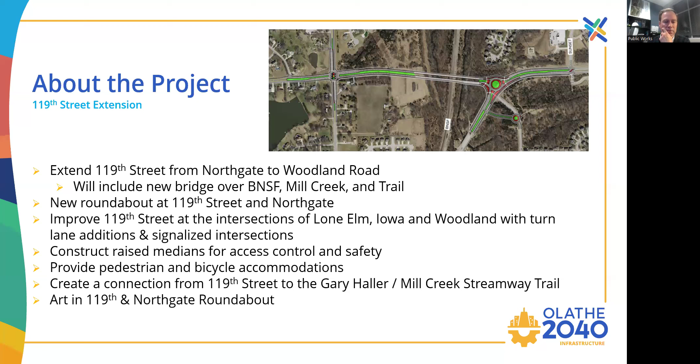Looking at the project as a whole, we will have improvements at the 119th Street and Lone Elm intersection, with turn lanes in all directions as well as a signalized intersection. We will have improvements at 119th Street and Iowa, new turn lanes in all directions and a signalized intersection, as well as removal and replacement of an existing wall on the southwest corner of that intersection.

Moving east to Woodland, this is where our intersection improvements increase in scope to allow for that new section of 119th Street between Woodland and Northgate. This is where we begin to taper out to meet the four lanes on the east side of that intersection. To accommodate that, we will also have improvements at Cherry Lane to tie that back into Woodland Road.

The actual 119th Street extension will be a 4-lane divided arterial section. Two separate 860-foot span bridges, 60 feet high at some points, will serve as our grade-separated railway crossing over BNSF, Mill Creek, and Trail.

Further east, we will tie in 119th Street at Northgate with a new roundabout. We will also realign the Northgate and Nelson intersections further south to safely tie into those new roundabout improvements to the north.

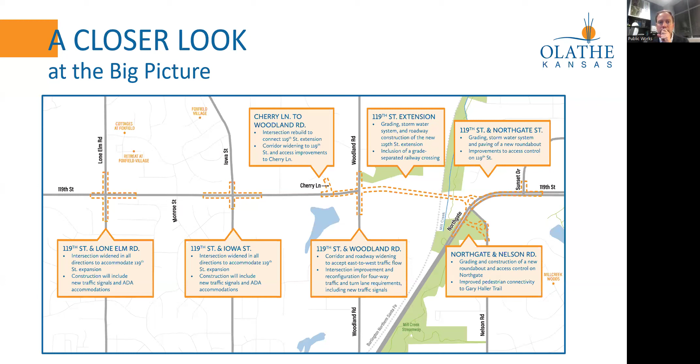Introducing our construction team. Again, my name is Neil Meredith. I'm the project manager for the city of Olathe.

Also on our team for this project from the city of Olathe will be Steve Craig and Roderick Montgomery. They will be our daily on-site presence from the city of Olathe. We will also have our inspection supervisor, Nate Gronow, present on this project as well.

Our construction team is led by Pyramid Contractors, Inc. They are a very experienced bridge contractor here in the city of Olathe.

They've completed multiple projects in the last few years alone, and the city is excited to have them on board for this project. Their main points of contact: their project manager is Pat Weaver, and their field contact is Blair Lecluse.

Joining us as well will be our structural inspectors from HDR, John Casey and Drew DeGoo. HDR is also our design engineer for this project.

Walking through our anticipated construction sequence for this project, our general schedule was set up to try to minimize impacts to traffic as best we could, knowing that impacts could not be avoided.

Our intent in 2025 is to work on the west side of the project between Lone Elm and Woodland. Along with those 2025 improvements, we will have a contractor presence between Woodland and Northgate.

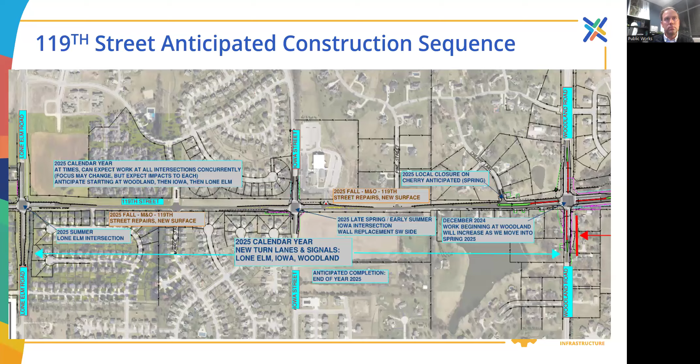Moving to the central and eastern portions of our project, I would expect a heavy contractor presence in 2025 and 2026 between Woodland and Northgate for the new 119th Street bridge construction. We also have a substantial water line relocation in that area as well.

Moving into 2026, we would expect to see impacts at the new 119th Street roundabout. We will do our best to limit that closure. The city has done proactive scoping items, working with the developer on the south side of that street to construct some sidewalk and readjust grading to prepare for those improvements, minimizing impacts to both their development and traffic, and to expedite our work. But we would expect that to be a substantial closure due to the scope of that roundabout and the activity needed at that location.

It will not be for all of 2026, but I would anticipate it's a pretty substantial piece of 2026. The city will provide updates as we get closer to that construction through the city website.

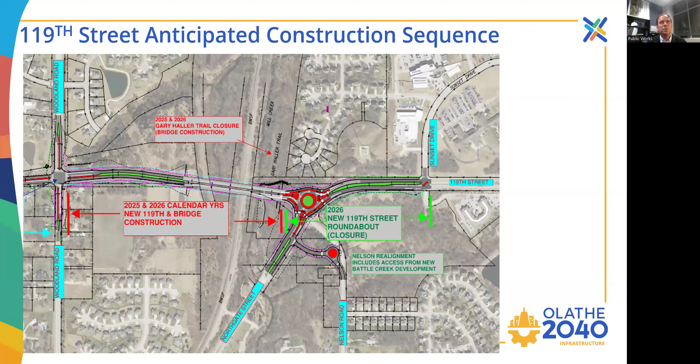Walking through some of the closures that have been a substantial part of this as well: in 2025 we would have that Woodland closure that will likely focus on the summer, but that could be a 4 to 8 month closure.

The Gary Haller Trail under the 119th Street bridge will be closed soon. Our contractor has started some activity on the east side of the project, and based on the scope of their work, we anticipate the Gary Haller Trail closes in the vicinity of our proposed bridge in early January, potentially as early as January 6th.

We will have a local closure at Cherry Lane to tie in those intersection improvements. I would expect that to align with our Woodland closure as well. We do hope to have the west side of the project substantially complete by the end of 2025.

In 2026, we would expect to see that 119th and Northgate closure. The Gary Haller Trail under the bridge will continue to be closed. And we will have a closure at Nelson to do that realignment, tying that intersection in further south along Northgate and creating safe distance from the proposed roundabout.

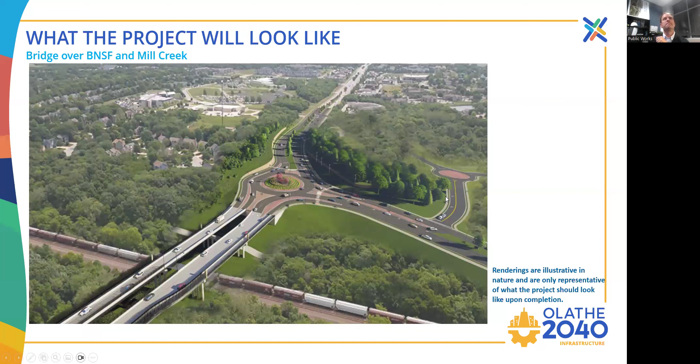Again, looking at that roundabout, we have a visual rendering here. Visualization purposes only, not intended to be representative of the final product.

But the city does have a public art committee. That committee oversees the public art program, which fosters the commissioning, acquisition, and preservation of public art in Olathe. If you have any questions about the art process or the public art committee, please feel free to contact Renee Rush. She is our staff liaison to that art committee.

This will be a centerpiece for residents and visitors, welcoming folks along our 119th and Northgate corridor into downtown, which continues to be a centerpiece for our community. Again, that rendering is not necessarily representative of the final art piece, for rendering purposes only.

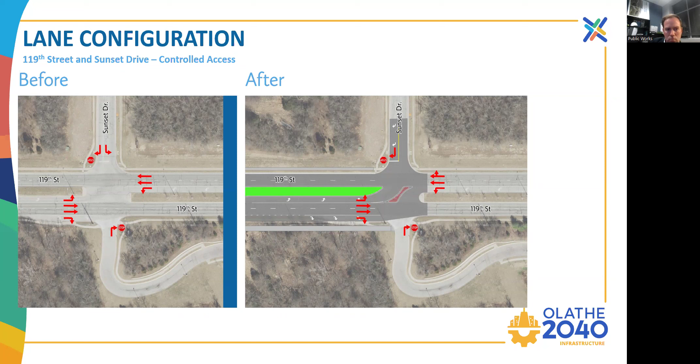Carrying that further to the east - these are our planned limits at Sunset. Again, that carries traffic to the roundabout. We have a protected right going westbound into the roundabout intersection, which allows folks to make that movement protected, but we also have two through lanes through the roundabout in that area.

Let's see what else. Someone is asking about the water main relocation and negative impacts to neighborhoods. The water main relocation we're discussing is a 30-inch transmission main, so we wouldn't anticipate that putting people out of service. We would work with our line maintenance department ahead of that closure and communicate any impacts directly to residents at that time. It's not a distribution main - it's not something that directly provides water to individual residents. So we would hope to avoid any impacts with that relocation.